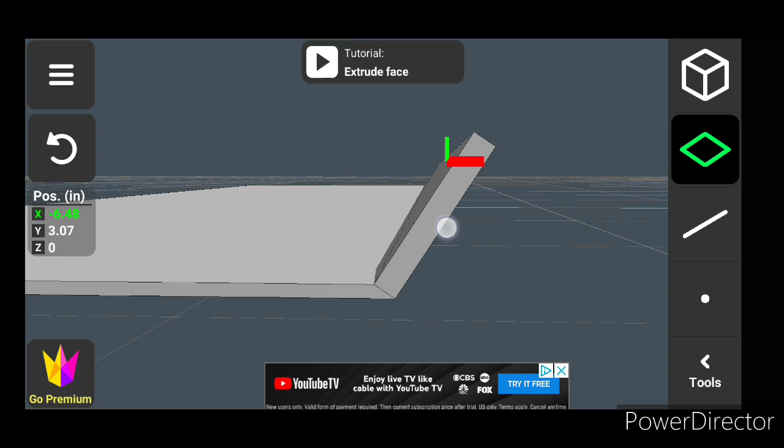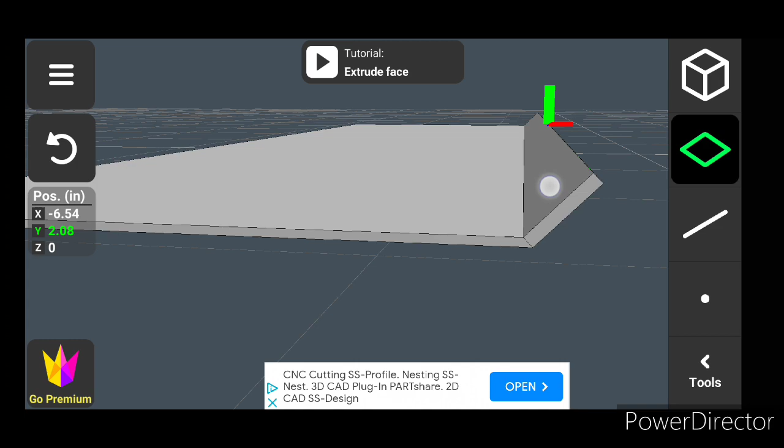As this design has evolved, and this was started as part of the heavy-duty supercar design, I came to realize that my frame was not offering sufficient strength, nor was it giving me sufficient room to place things, because I had designed the car to have a belly pan that was the basis of the chassis, and that did not work out great.

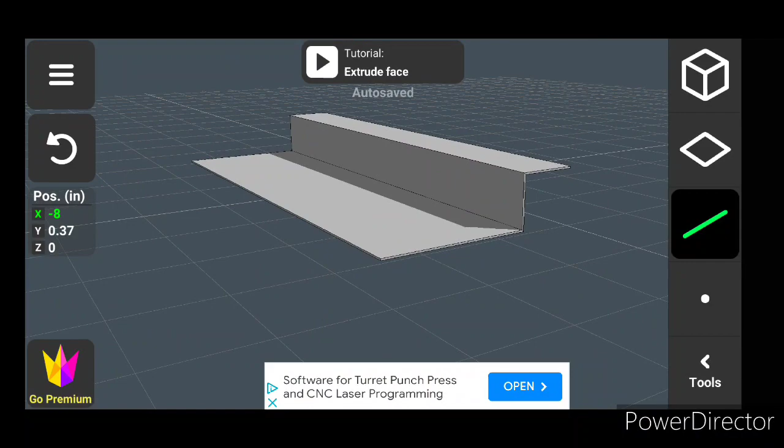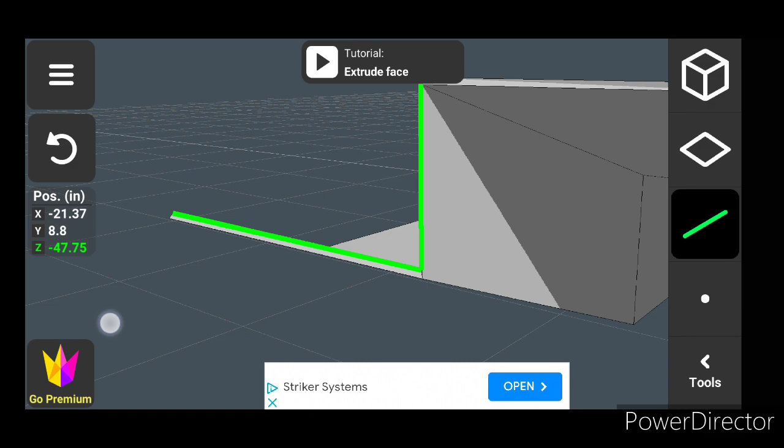So what I decided to do, because I've been watching a lot of videos regarding carbon fabrication, I was confident enough that I could design a carbon tub. I have friends who work in the gel coating business. One of my best friends is lead gel coat repair tech at a company that makes fantastic yachts, and lots of people pay big money to have one of these yachts.

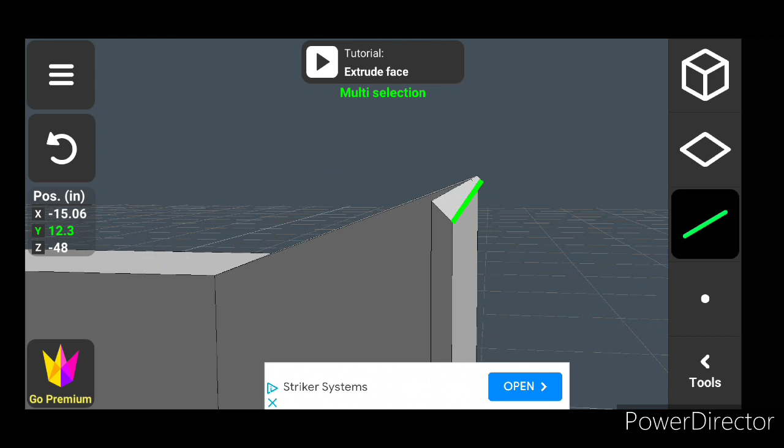They go for, I think, starting at $500,000 a piece. So he's got a lot of composites experience in his boat building career, and he has agreed to help me mold this carbon tub, which we are going to use an infusion molding technique to create.

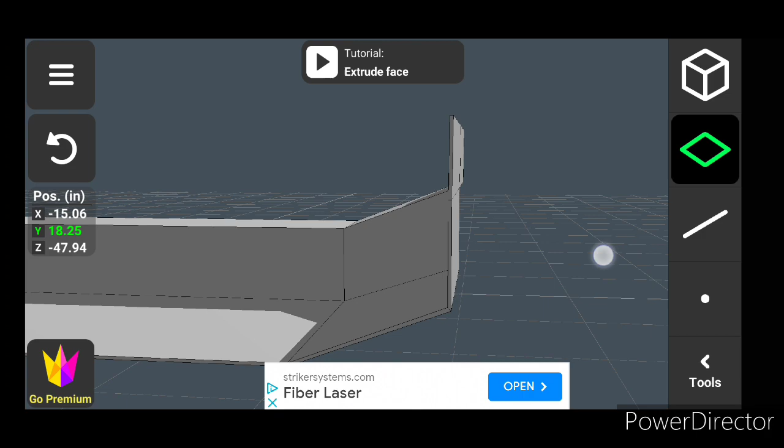We are going to do a combination composite where we'll have several different layers of different materials organized in a couple different ways. We're going to have a steel lattice frame - basically tack together a frame of steel slats that are going to be like the backbone of this. We are going to do a carbon fiber core.

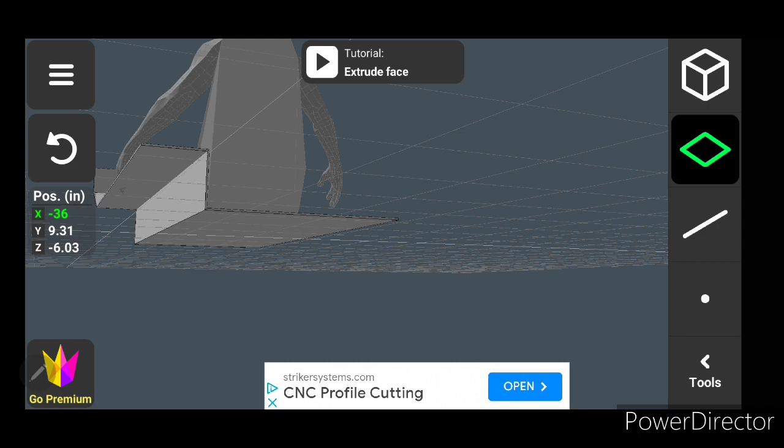We're going to try and do the carbon fiber core in 3 sheets with minimal relief cuts. We're going to do that as efficiently as possible, with as much strength as possible.

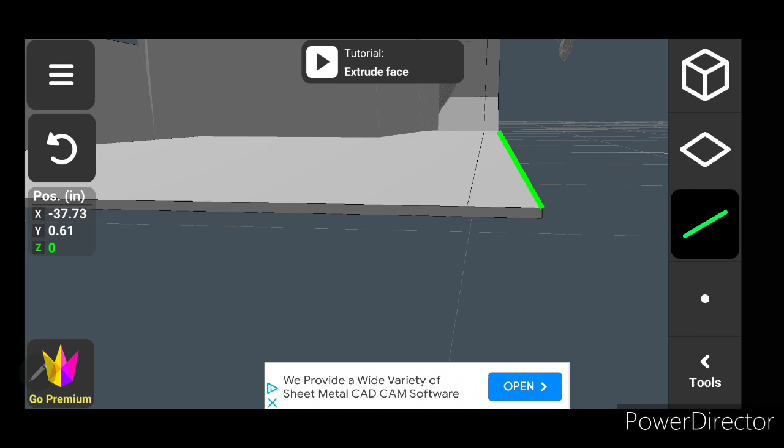And then from there, we are going to lay a foam core layer. The foam core layer is going to basically just provide spacing in the final product. We're going to have a thin foam core on either side of the primary layer over the lattice structure.

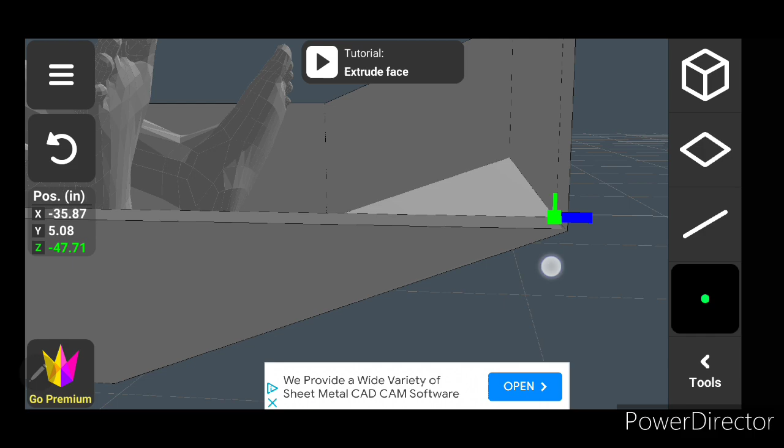So that's actually going to give us 3 layers of a composite with 2 layers of foam core, as opposed to a lot of the supercar companies, a lot of bespoke car manufacturers that use carbon fiber tubs.

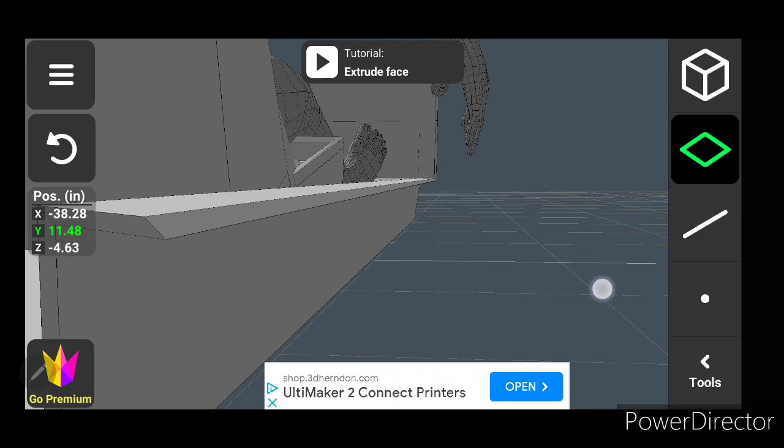What they will do is they have pre-bonded carbon weave on their foam core, and they basically just lay a bunch of pieces of this foam core carbon fiber setup into their mold, and once all the pieces are in place, you start the infusion molding process, where the whole thing is subjected to a very high vacuum.

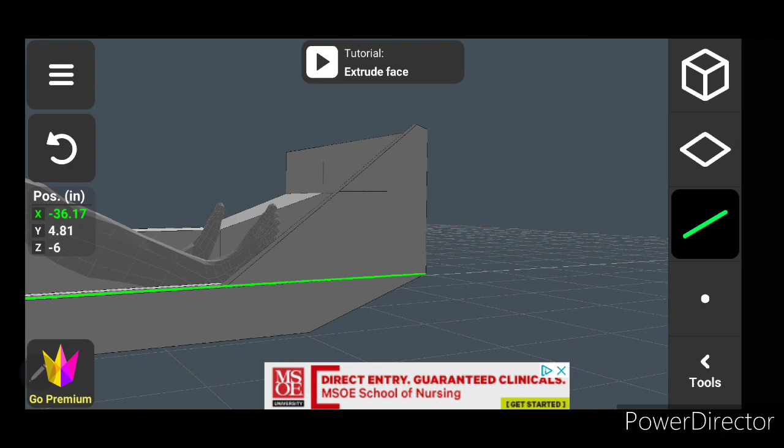It's vacuum sealed, and that vacuum seal causes the resin, the hard resin that actually gives it its form at the end, to suck into the molded object. So what you get is one solid piece, one solid structure.

By using the foam core on both sides with the carbon fiber in the center, I'm giving myself a lot of added rigidity, a lot of extra strength that is probably excessive, but I want my passenger compartment as strong as possible. And I want to build my forward crumple zone both strong, but also to break the way that I plan on it breaking if it's ever to break.

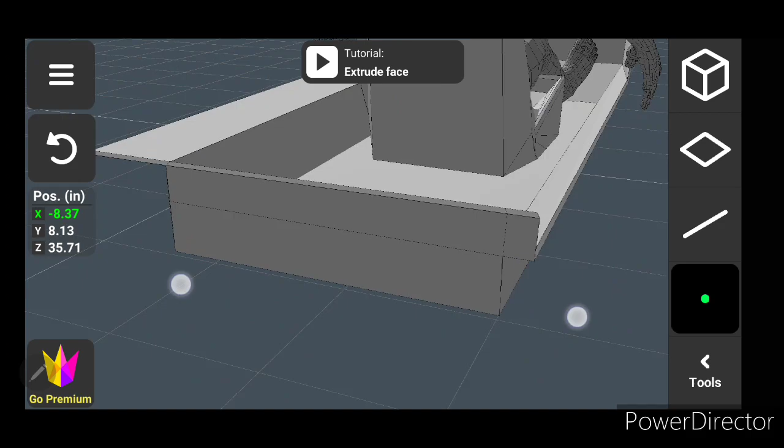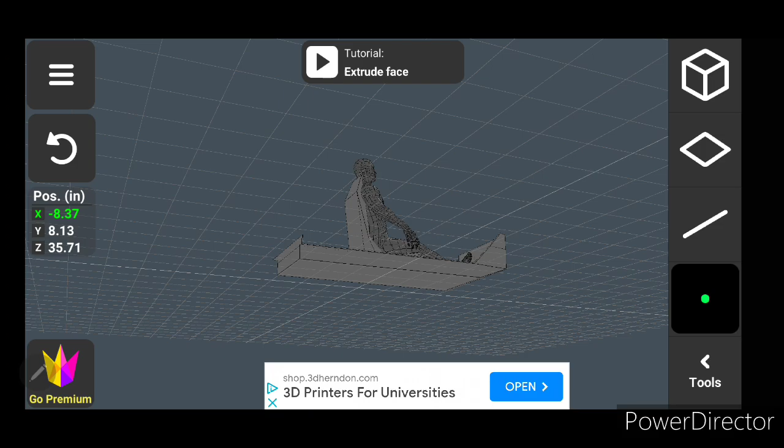Because the big thing about a crumple zone is you don't want to not know how something could break. If I set a cross member in the wrong place, and it's not strongly connected in every direction the way it needs to be, suddenly me or one of my passengers or somebody who purchases one of these cars winds up with a frame spar through their chest. So we want to avoid that at all costs, and we also want to avoid broken bones, broken legs, broken arms.

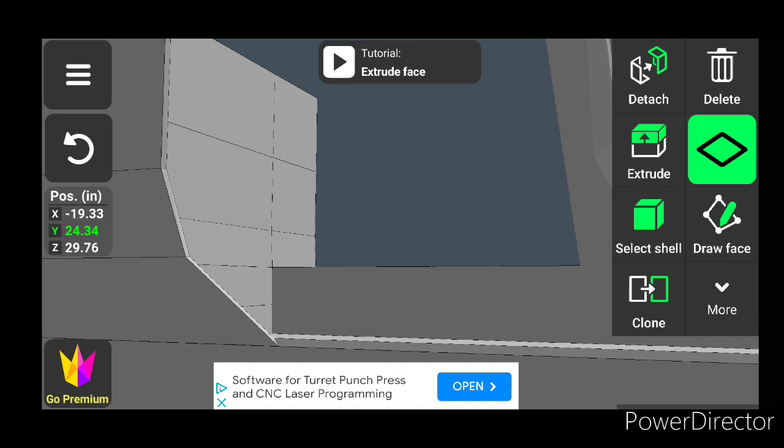So that's why I have decided for this build that I needed a scaled person. I have found, even as an average semi-tall guy, that sometimes a vehicle is too small for me when I get into it. I set this guy up at 6'2" and placed him seated in a seat that is custom tailored to be an appropriate seat size for him to be comfortable.

We're actually going to redesign that seat later - it's kind of just the same one that I've been using since I started modeling in this app. My skills have improved drastically since then, so I think I can probably design something a little bit more reasonable for that. And this is kind of where you start to see more accurately everything coming together as it's going to be in the car.

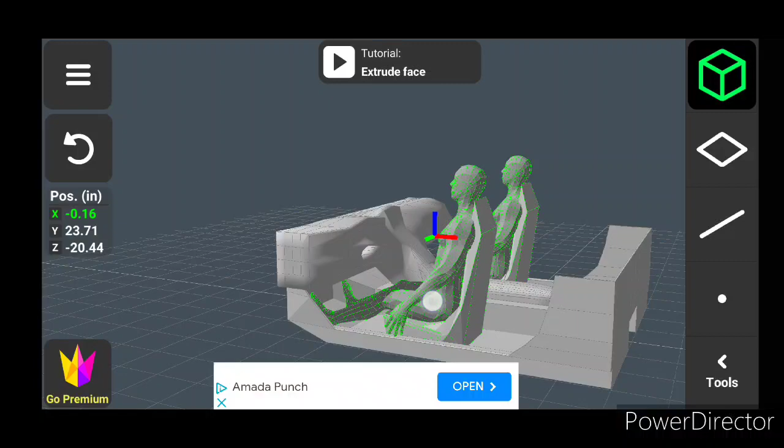You've got the dash in now, we've got passenger and driver in. This is allowing me to get an idea for a more appropriate seat position, a more appropriate steering wheel position, more appropriate dash size. So this is kind of where I've been running into a roadblock on the HD supercar build, and this is why I decided to do this as my next video, because I had really stalled when I ran into this realization that I wasn't going to have enough room to do all the things I wanted to do the way I wanted to do them.

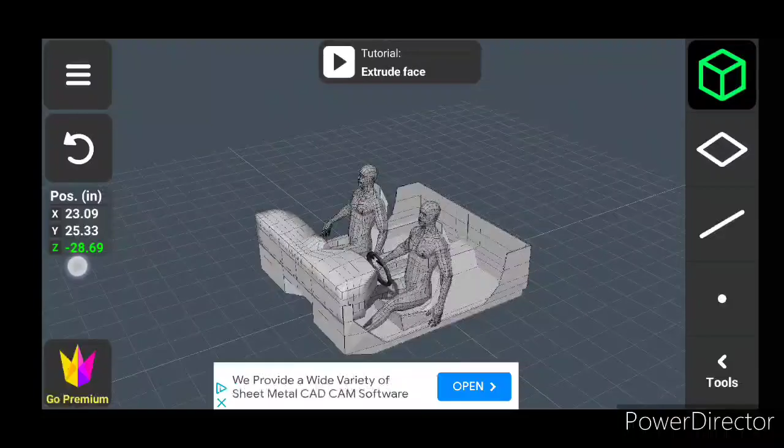But then it occurred to me that I hadn't really set the scale, I hadn't really defined how much of that room was free. So by designing the carbon tub, I am taking a lot of the thought and difficulty out of the passenger cabin, and I'm also allowing myself the opportunity to build a much more crash-conscious frame.

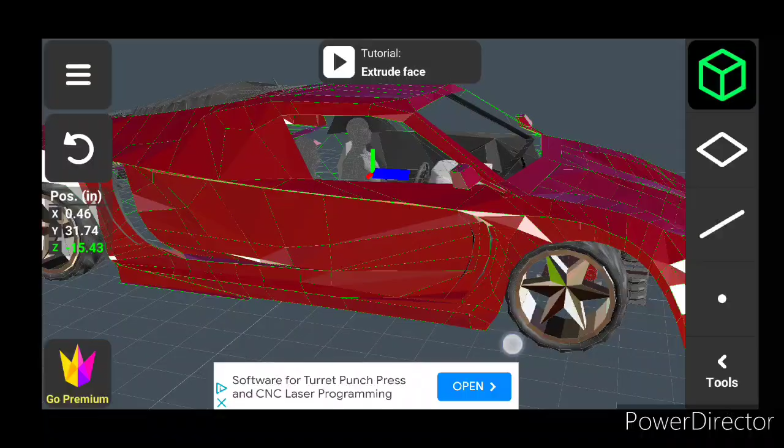And of course this tub is going to need to be polished a little bit. At this point I actually imported the entire file for the HD supercar, and you see me just deleting parts, going through and deleting anything I don't want to have to move around, to get an idea how this interior fits in the HD supercar without going into the main HD supercar file and risk messing that up for nothing.

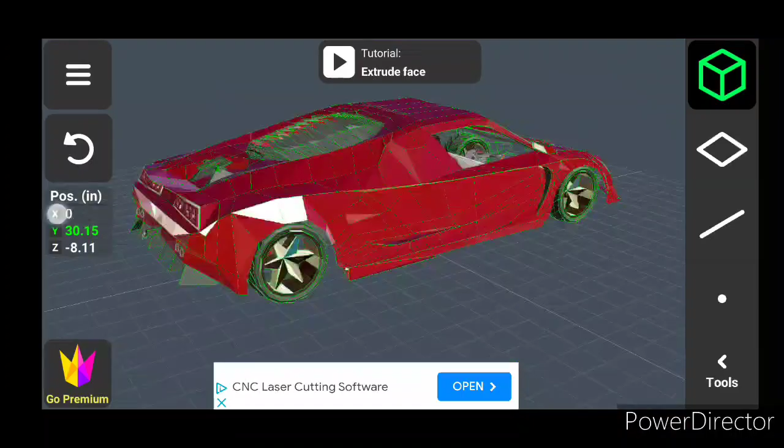So we got the HD supercar pulled in, and you see I took most of the mechanical components out of it. I missed a few, which I actually find out later. This is going to allow me to select just the exterior parts, and you see me doing that right now. Now I'm moving it over and figuring out what that's going to look like, how that's going to fit.

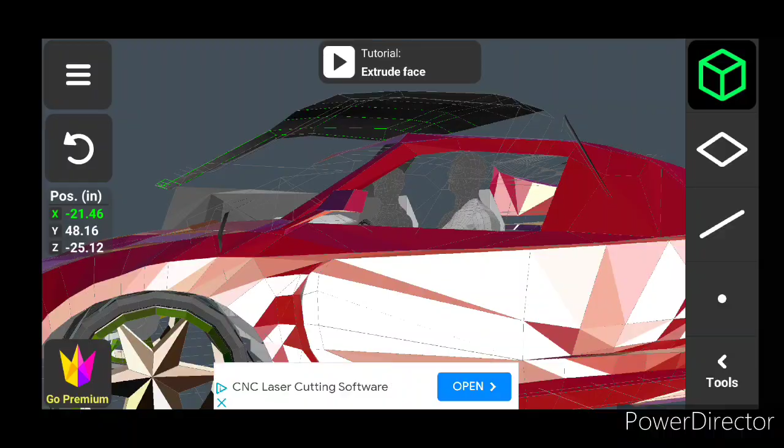So this is really changing the game and giving me a much better idea of what room I have in the HD supercar.

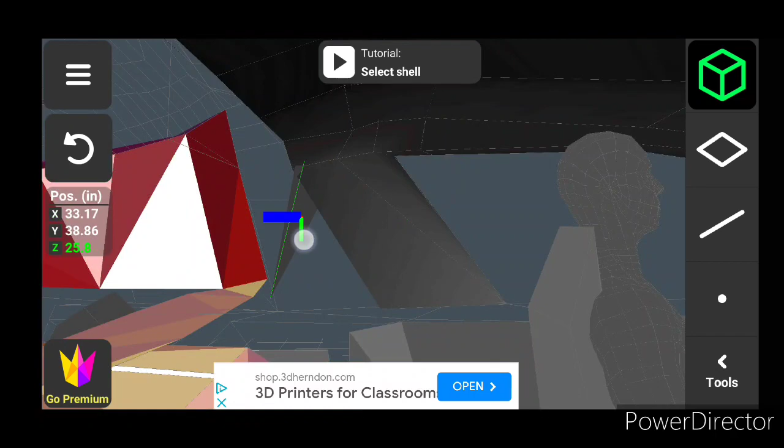Move my interior pieces back into place, a couple things got moved along the way. Just getting the trim in place so I can get a better visual, get an idea what's going on here with the HD supercar and how the world fits around it. Got to be honest, I actually lost track of where some of these trim pieces go and how they fit together, because they're just kind of abstract shapes in there to fill in.

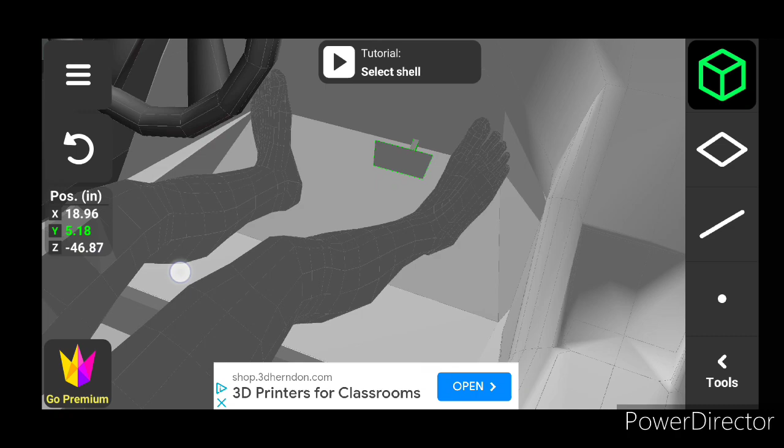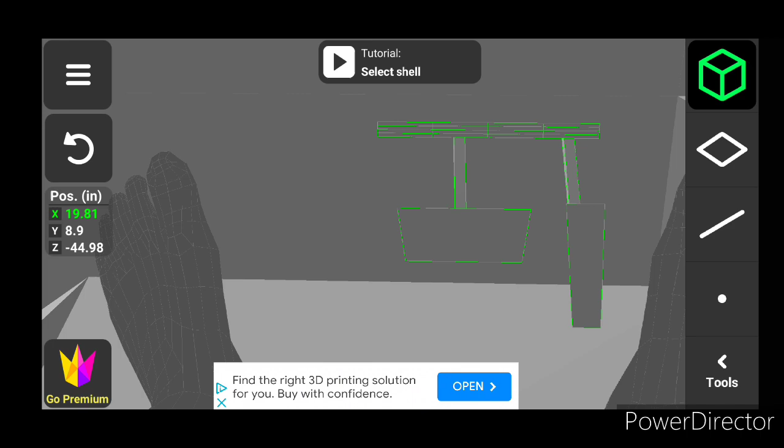This app is great, but one feature I don't really like about it is if you have a plane, it is transparent from one side. So if you create a cube, start every object with a cube. If you have very thin objects, like I went very thin, it's actually only a quarter of an inch thick on the carbon tub is what I'm planning for.

The foam core is going to shrink down a lot under the vacuum packing process, and the carbon layers are not going to be very thick, as we're trying to do just very solid lays. We don't want to have a lot of lays, we don't want to have a lot of sheets, we definitely don't want to have a lot of cuts, because we want to have just real pretty, beautiful carbon fiber.

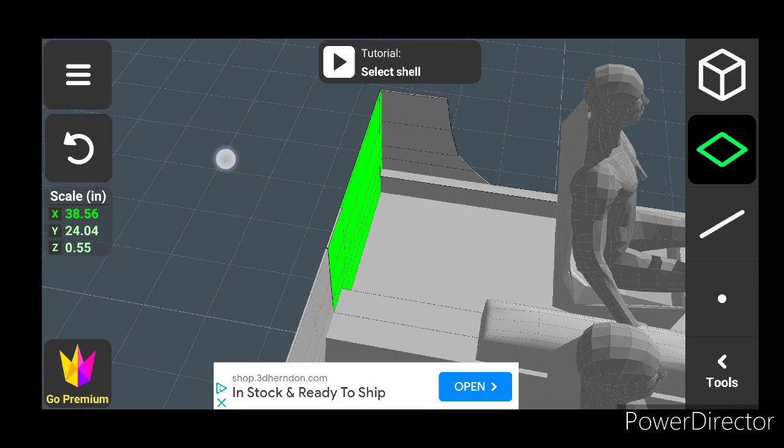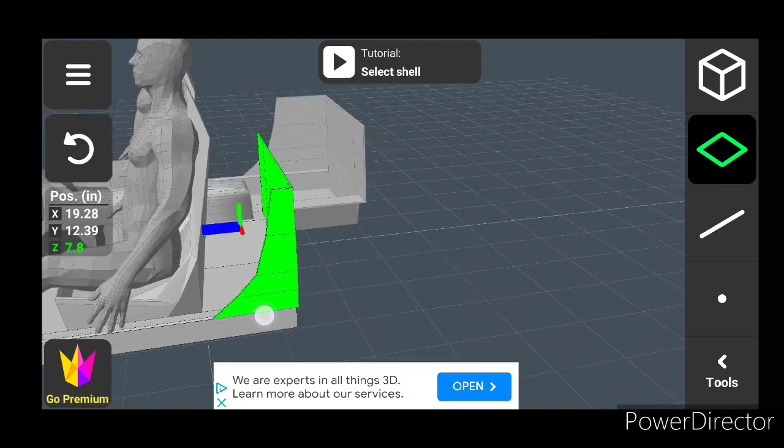I'm actually planning on using a carbon Kevlar weave. The carbon Kevlar is a little bit more expensive, but it does give some added flair to it. You can actually see the Kevlar in the carbon weave, it's got that same herringbone weave pattern. I think I'm going to go with red carbon Kevlar, so you'll see the red Kevlar strips throughout it in the same herringbone weave as the carbon fiber. It's a very pretty material, very high tech, very strong, very lightweight.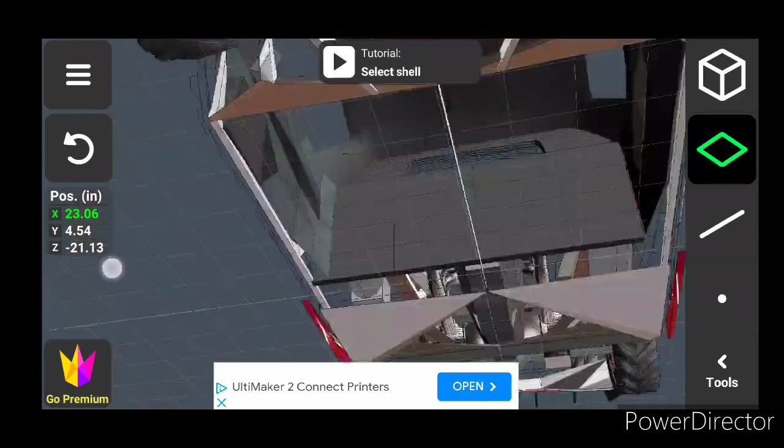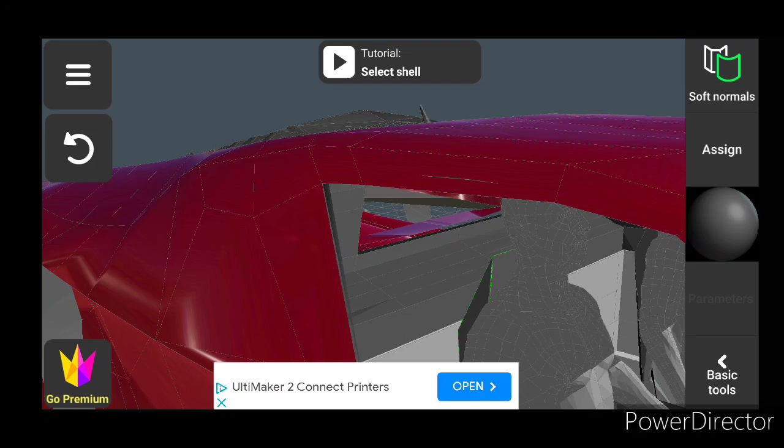And I'm not 100% sure, we're going to do some testing. I think that this carbon tub, and potentially, if I decide to go so far, the carbon Kevlar body panels, which if I do that, those will also be the same red Kevlar weave. It is, one, going to be gorgeous, but two, I'm wondering if it might turn out bulletproof, because of the force dispersion that the Kevlar will allow. So very interested to get some samples made up and start testing this composite that we basically designed for this build.

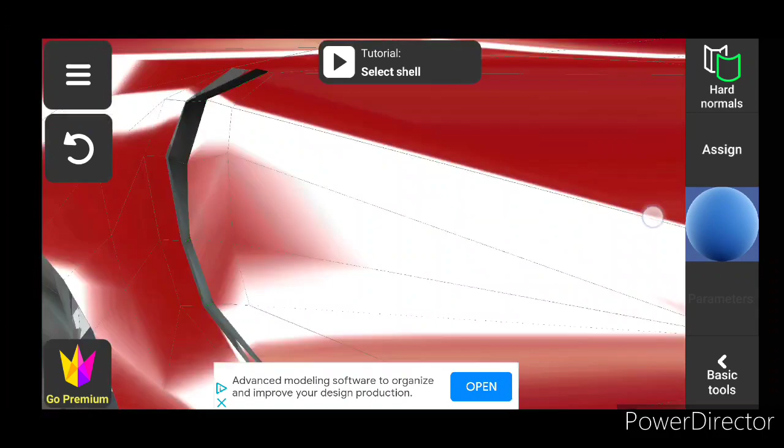This is going to be, to my knowledge, the first 3-layer foam core carbon tub for a vehicle. And it's going to be a 496 cubic inch V8 mid-rear engine supercar that can tow as much as 3/4 ton. So very excited for this build.